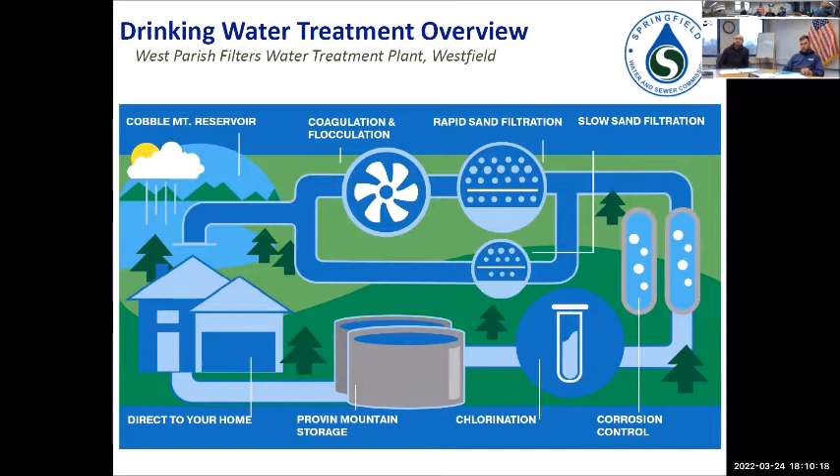Let's go to the next slide. We'd like to give an overview of our drinking water system. We draw water from the Cobble Mountain Reservoir, a 22 billion gallon reservoir out near Blandford, Massachusetts, and we treat it at our West Parish Filters Water Treatment Plant in Westfield. We've got 2 treatment trains at our plant: our primary treatment train is our rapid sand filtration plant, which dates back to the 1970s, where we coagulate, flocculate, and then filter that water directly through our rapid sand filters. We often augment that flow when needed through our slow sand filtration plant, which dates back to the 1920s. After water is filtered, we treat it with corrosion control and chlorination chemicals, and then it flows down to our Provin storage tanks over in Agawam, through our transmission mains, and it's along that transmission main that we have the interconnection south.

And Elise is going to talk a little bit about disinfection byproducts and why they're forming in our system.

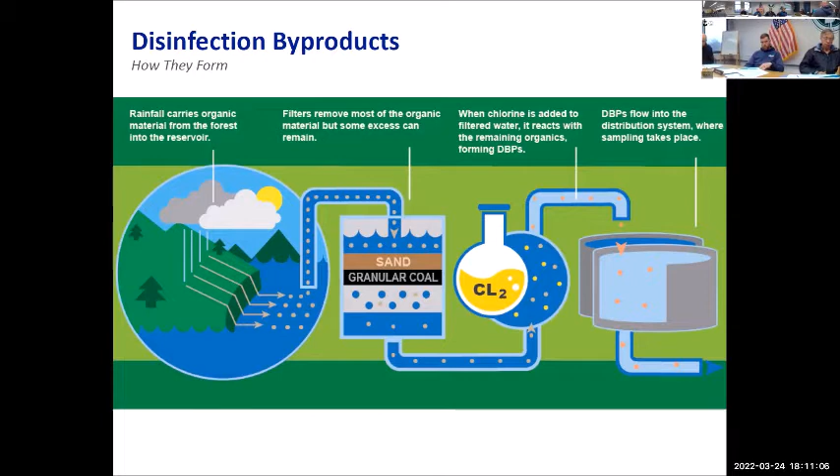So this is a handy graphic to show how they're formed. It starts in the watershed, where natural organic matter from the forest can get washed into the reservoir through rainfall, which carries it into the water supply. Then we get our water supply and it goes to the treatment plant, where the filters remove some of the organic matter, but some is left behind. What's left behind can react with the chlorine we use for disinfection, and those two react to form DBPs. As that water flows out to the distribution system, they continue to form, increasing the amount of DBPs in the water throughout the distribution system.

Haloacetic acids: there are five compounds regulated under the disinfection byproduct rule. Like I said, they form from natural organic matter found in the watershed and forests. The picture here shows what we mean by natural organic matter: leaf material, soil, sediments, and other things found naturally in the watershed. This can be washed downstream.

This is a picture from last June. You can see how rapidly this stream is flowing into Cobble Mountain Reservoir, washing all of that organic material into the reservoir. We take that water, filter it, and then treat it with chlorine for disinfection, and that's when DBPs form.

DBPs, which are haloacetic acids and total trihalomethanes, were first regulated in 1999, and those regulations were updated in 2012, which included an MCL, a maximum contaminant level of 60 parts per billion for HAA5s, calculated over 4 quarters averaged together. So it's a running locational annual average at each site specifically.

The MCL was determined as kind of a balance between adequate disinfection and minimizing long-term health effects. There's a risk of health effects from long-term consumption of the water.

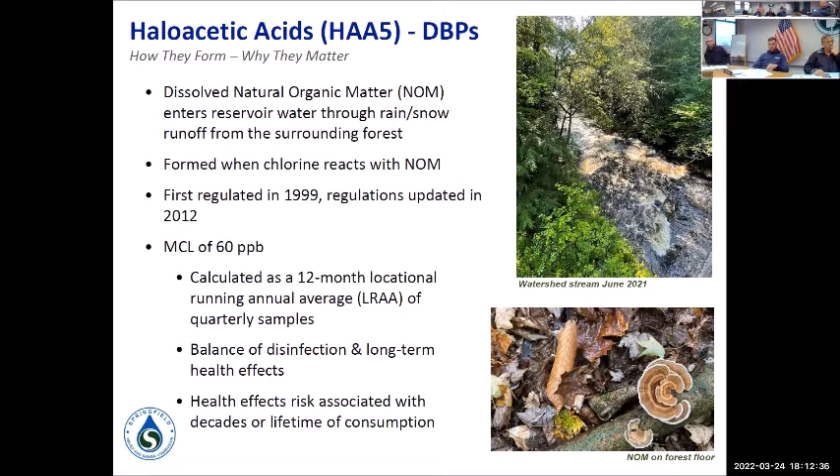So a couple of treatment challenges we faced this year changed the quality of the water and interconnection. First, we had record rainfall in July and August, plus a couple of hurricanes in August, and that flushed a lot of natural organic matter into our tributaries, then into our reservoirs and into the raw water at the plant. When we saw that higher natural organic matter coming in, it forced us to increase our chlorine dose to meet the chlorine demand introduced by those organics. That additional chlorine plus additional organics resulted in higher disinfection byproducts in the system.

This is something we've also been struggling with on and off since 2018 or so, but it was particularly bad this last year. The second thing that happened was back in January, we experienced a catastrophic failure of one of our six rapid sand filters. The underdrain system completely failed, and it's currently down, out of operation, and under construction. We're working to repair it as quickly as we can, but it's projected not to be repaired until July, so it'll be a while before we can bring our rapid sand filter plant back to 100% capacity.

The problem this introduces is that it forces us to rely on our slow sand filtration plant in the meantime, that 1920s-era plant. The slow sand filtration plant is really only removing about 7% of the incoming natural organic matter right now. It's winter, so this might improve as things get warmer, but that's what it's doing right now. That's in comparison to the 60% removal we typically get from our rapid sand filtration plant.

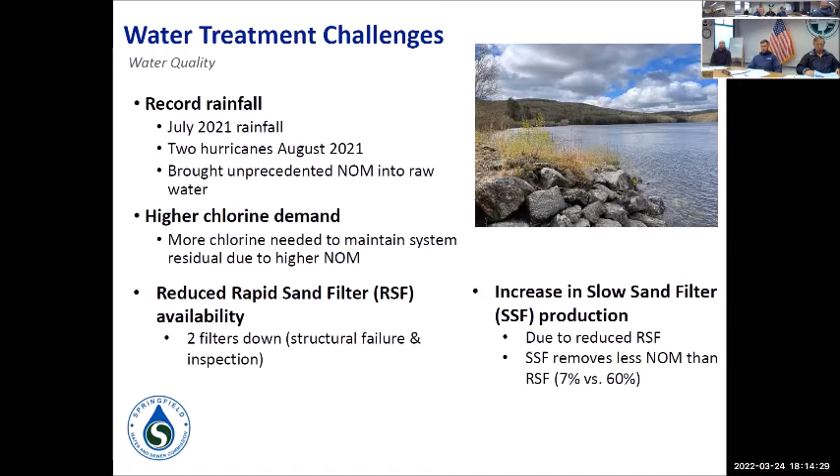We've also been forced to increase production with the slow sand filter plant to about 45% of our total production. So we're doing about 45% with our slow sands and 55% with our rapid sands. It puts us in kind of a tough spot. Elise is going to show you a couple of graphs in the next couple slides.

In 2019 and 2020, we had less severe rainstorms. 2020 was a drought, and we had significantly lower organic levels. Then in August, we had a lot of rainfall.

We had an initial spike in August and September for organics, then dropped down in the fall. Once the reservoir turned over and the water became mixed in the Cobble Mountain Reservoir, we saw another significant spike in organic levels. We're still at the same level right now, and they haven't really come back down to normal like we used to see. They've stayed high since the reservoir turned over in early December.

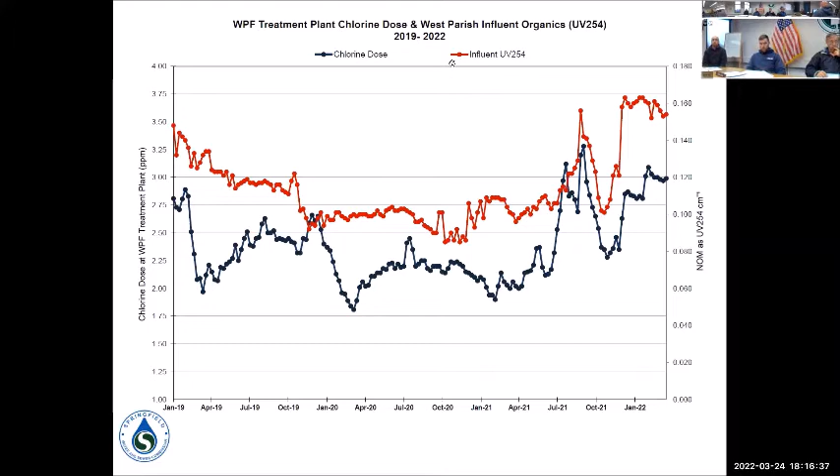As we've been saying, natural organic matter and chlorine in the water are added together. If they're both elevated, we're going to see elevated disinfection byproducts. That's what happened at your sample site at Jarry Drive, where there was a result of 108 parts per billion back in February, which led to an exceedance of the locational running annual average.

You can see these are the locational running annual averages going back to Q1 of 2020, and this red line is the MCL of 60 parts per billion. This past quarter in February, you exceeded it. Since it's an average of 4 quarters, it's going to take a while to average out this 108 result. So this situation might go on for a little bit longer until results are down for multiple quarters. Even if next quarter you have a low result, it's not going to average out these results.

So it might linger for a little bit longer, into next year.

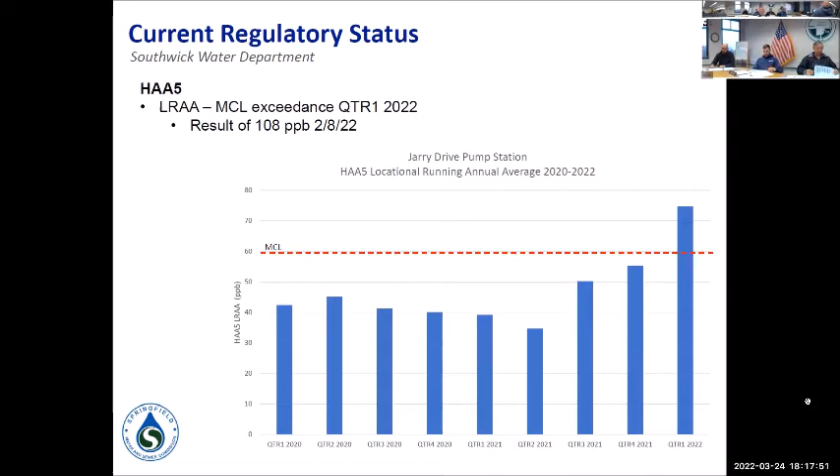This has been an ongoing problem for us since 2018, as I mentioned, so we've been working to optimize the system we have now as best we can to keep those levels as low as possible. One thing we do is daily look at our chlorine dosage and keep it as low as we can while maintaining adequate residuals in the system.

We also flush our system to try to push out some of that older age water, so we don't need to keep our chlorine doses as high at the treatment plant. We optimize our coagulant dosing so we can maintain our 60% NOM removal target rate — again, that's with our rapid sand filtration plant. And we monitor those UV 254 levels so we can monitor what kind of organics we're sending out to the system.

We also try to reduce how much we use those slow sand filters, which remove less natural organic matter than the rapid sand filtration plant does. But right now, until we get that rapid sand filtration plant back online, we need to continue to rely on the slow sand filters more than we'd like to. We also do disinfection byproduct monitoring by analyzing in-house our TOC, DOC, and TTHMs in our effluent water.

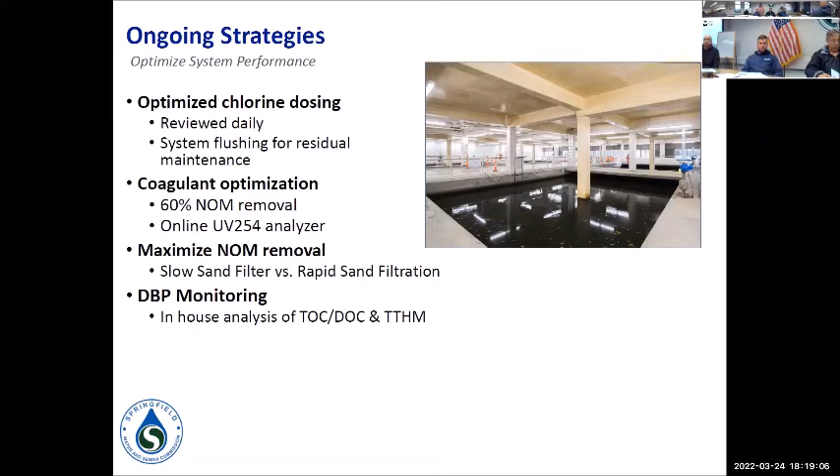Go to the next slide.

But again, this is a long-term problem for us, so we're really working toward a long-term solution. We are in progress and underway on the design and construction of a new treatment facility that will be able to remove enough NOM to keep us within regulatory limits. We're currently constructing a clear well and backwash pump system that will operate with our existing plant, and it's also the first stage of the new treatment facility.

We're in design right now, on an aggressive design schedule for an 80 MGD conventional treatment plant. This plant will have a dissolved air flotation clarification process, which is a process we don't currently have in our rapid sand filtration plant, and this will dramatically improve our ability to remove those organics.

We're also designing it with 10 filtration trains. It will be able to meet the full capacity of the system, so we won't need to rely on the rapid sand or slow sand filtration plants. We're funding it with WIFIA and SRF financing, with an estimated cost of $238 million.

We're required by our WIFIA financing to have this plant online by the end of 2027. That's about 5 years out. It feels like a long way off, but we have a lot of work ahead of us to design and build the plant and get it running again.

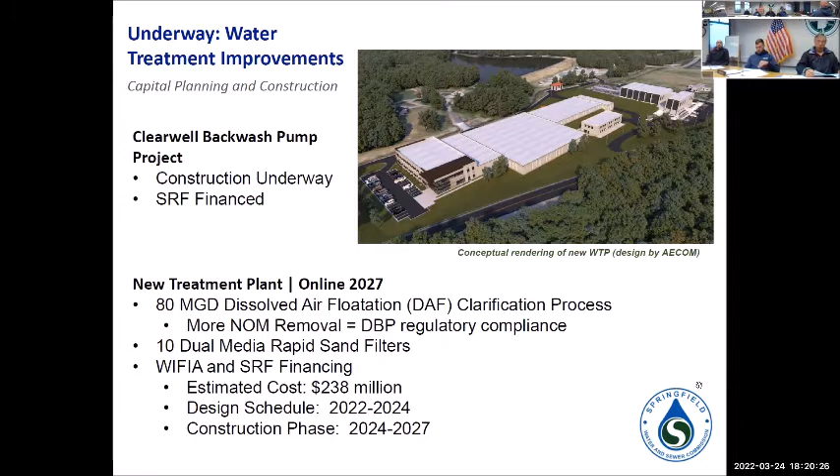The next couple pictures are just of the construction of our clear well structure. The contractor right now is completing the demolition of 3 of our old slow sand filters to make room for that clear well structure. Ground is broken and we're actively working to improve our treatment system so we can provide water that meets regulatory compliance.

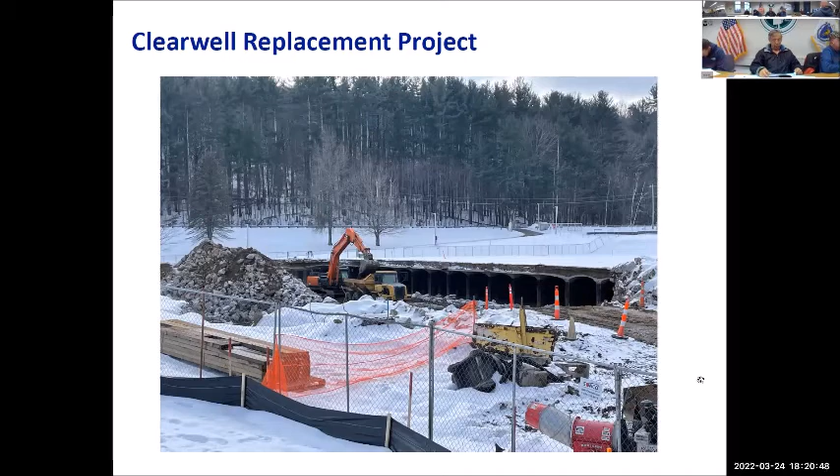That was all. We wanted to talk through all that with you today, and we welcome any questions.

I think they covered all the bases, they did a very good job. A couple of key points, obviously there's something we're all aware of and working towards a fix. But it's going to be several years, 2027 is the end goal, but between now and then we may see more of these violations come through.

And we've already violated Q2. We haven't even taken the samples, but because the last 3 quarters are so high, even if we get 0 in Q2, we still violate. So that triggers everything we just did, the public notice, if they send out once again. Just so everyone's aware of that.

When's the backwash pump project going to be completed? When it's under construction, that's scheduled for, I think, early 2024, maybe a couple years out. One of the challenges with getting that completed, I say I think because the supply chain issues have made it very complicated to nail down an actual schedule with the contractor.

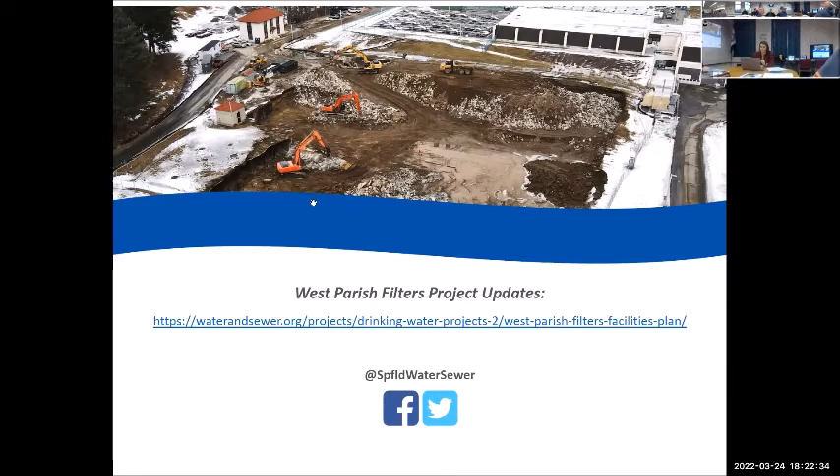So once that new plant gets online, you're not going to be doing any filtering up there? Well, the new plant is right next to our existing facility, same location. If you go back 3 slides you can see the rendering. I thought it was going to be somewhere else, I misunderstood. No, it's going to be there, same location. So we're still going to have treated water, better treatment. Correct.

We have a lot of space on campus where our slow sand filters are, so the plan is to demolish the slow sand filters to make room for the new plant. That's great, so we're fortunate to have that space.

One thing to point out is this is their water before it's blended with our water, and we take samples in this building every 3rd quarter. So you can compare the results from the water at Jerry Drive versus what's in this building on the same day. It's also in your packet and on the website, there's a table. Looking at the last 3rd quarter of 2021, at Jerry Drive haloacetic acids were 92.3 parts per billion, and in this building it was 4.9. So you can see after blending it's very much below the MCL threshold. But the way the regulations are written, we're required to test at the entry point.

Did you want to entertain questions from the public?

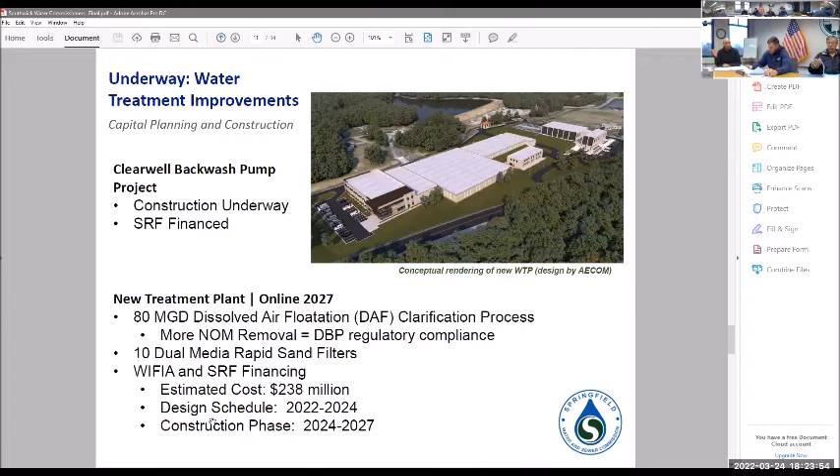Yeah, go ahead, just state your name and address if you don't mind. My name is Sandra Heath, and I live at 16 Lincoln Circle.

I guess the question is, first of all, I always thought we gave water to Springfield. I didn't realize it was the other way, and I've been living here since '75, but for some reason I thought it was the other way around. How do we know, we live in the same complex, what portion of the water we're getting that's mixed with our water? How do we know how safe we are, or what we should be doing? We have it, we drink it, is that okay? We have little kids we take care of, is that okay for them to be drinking it? How do we know, is the mix the same for everybody in Southwick?

Does every household have 90% Southwick water and 10% Springfield water, or is there a mixture? It's probably based on your location. Those of you on College Highway North of Town Hall, the water you're drinking is primarily coming from Springfield. The mixing happens right in downtown, once it gets into the center of town.

So most of our water is their water? I would say most of it, yes. So we got kind of a great deal there.

Are you saying that you have a plant that is from 1920? It would be helpful if it had been replaced, is that what you're saying? I don't know, it was hard to understand, because it's not my background, and it was quiet when you were talking. Being an older person, maybe I don't hear as well, but I couldn't really get the gist, but I thought I heard that about 1920.